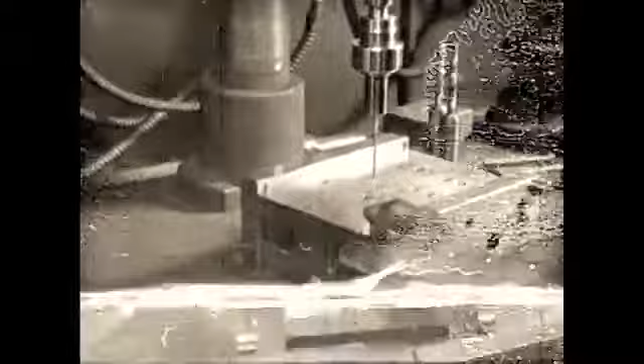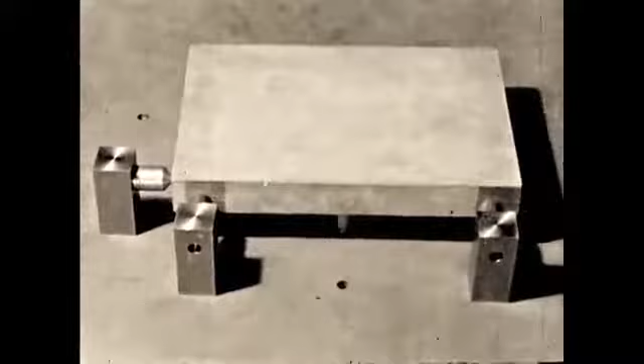Therefore, we see that it is necessary to have at least 6 locating points correctly arranged to definitely position a piece at a certain place. But sometimes a fewer number of stops can be employed successfully because some of these stops may combine several locating points in one member.

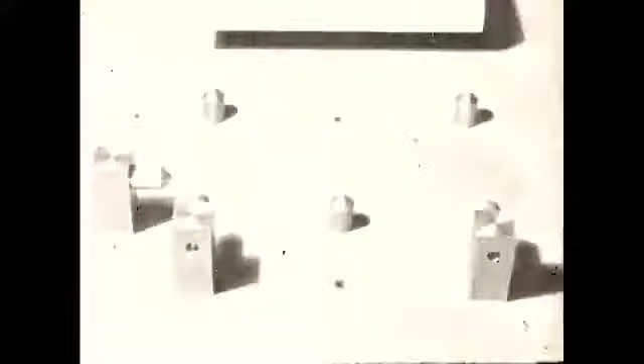For example, if we have a round hole in a piece of work, this can slide over a peg of the same diameter, which prevents the work from sliding to the left or right, or from front to back.

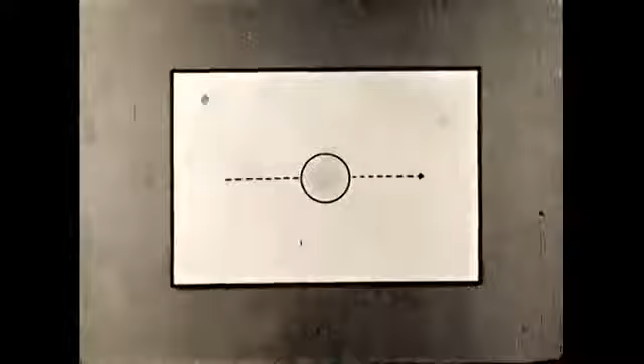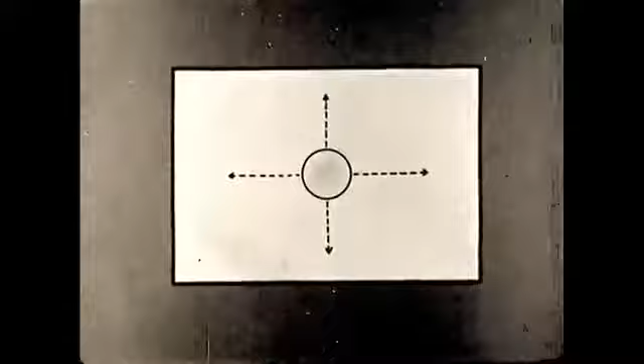If a shoulder is provided so the work can rest against it, it will prevent the work from rocking. Therefore, the only remaining movement that it can make is to rotate. If the work is held against a second stop, it is located definitely in a single position.

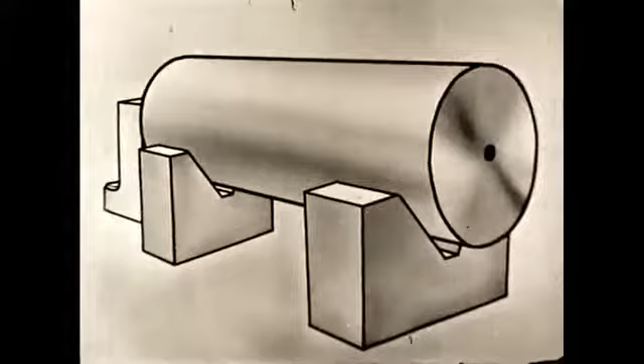Round work is frequently located by means of a V-block, which combines 2 locating points in a single member. These V-blocks and one end stop provide us with suitable locating means for a cylindrical piece, which need not be restricted against rotation. V-blocks are suitable for locating members having rounded portions, and they are also convenient for clamping means,

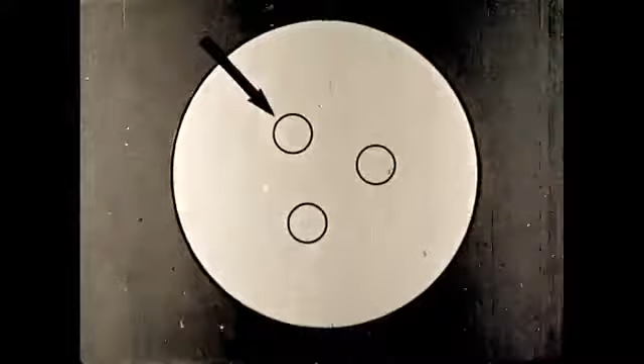As in this case. Whenever we support a flat surface, it is preferable to use only 3 fixed points, and these should be spaced as far apart as possible.

If we supply more supporting points than this, the additional points should be adjustable, and this is a good form of adjustable support. A spring in the base ensures contact between the plunger and the work, while the set screw clamps the plunger firmly in place.

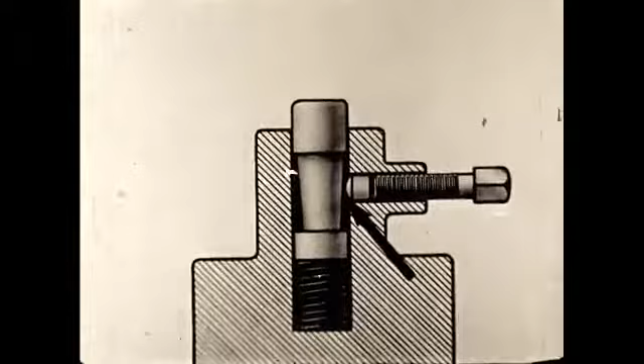And regardless of the amount of pressure applied to the screw, the work is not distorted. The taper slide acts to resist any pressure against the support.

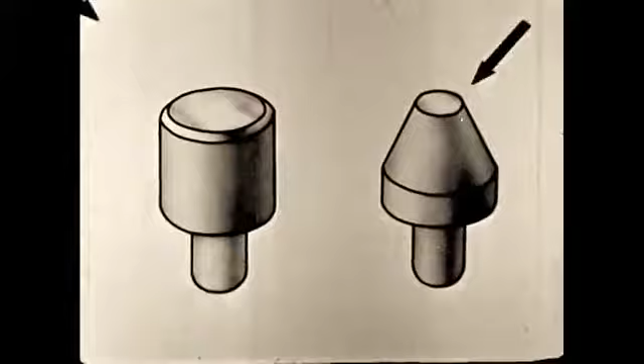The locating surfaces should be as small as possible, consistent with bearing area and wear, in order to make it easy to keep the fixture free of dirt and chips that would interfere with the proper seating of the part.

If a locating pin is to fit within a hole in the part, it should be tapered to permit the work to be placed over it easily, and should be hardened and ground to size. A burr clearance should be provided around the pin.

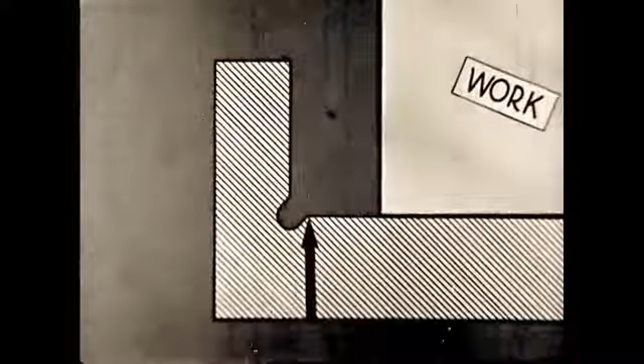If flat surfaces are used at right angles, a dirt groove should be incorporated. In general, buttons are better supports and locating means than flat surfaces, and a button is better if it is placed end-on instead of sideways to the work.

The work should be supported as nearly in line with the tool thrust as possible. In this case, the work is not adequately supported, and the thrust tends to bend the work. Another thing, the leverage of the extended work requires more clamping pressure to secure the piece.

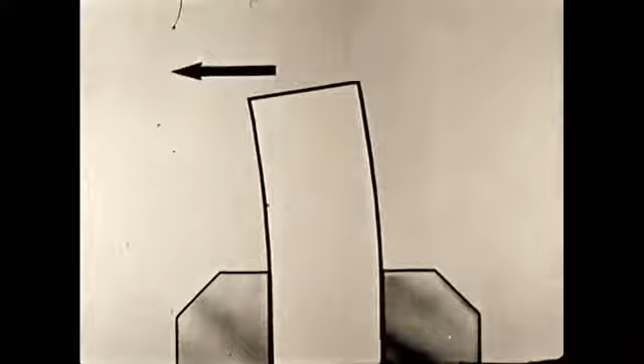When the clamping jaws are more nearly in line with the thrust, the work is much better supported against the pressure applied by the tool.

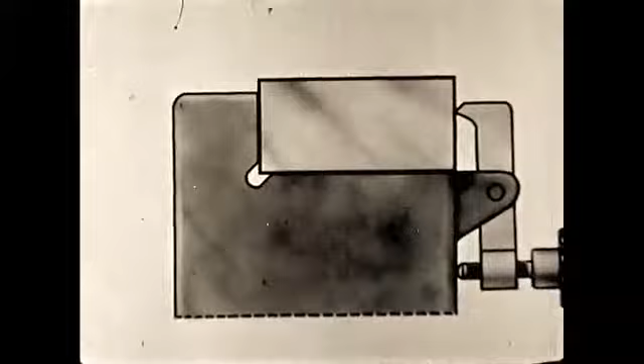A fixture should always be designed so that the tool pressure comes against the solid part of the fixture and not against the movable or clamping portion.

The part may be clamped in a variety of ways. Here is an example of a lever combined with a screw clamp. Sometimes a cam is used, and here is an interesting example.

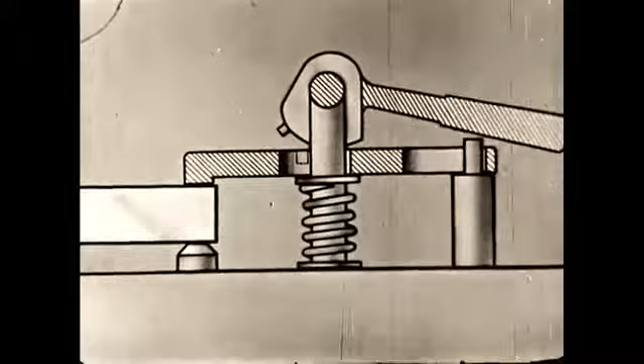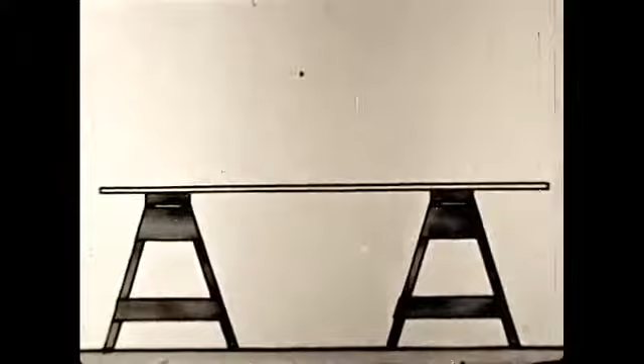A wedge is another method of clamping. Whatever kind of clamp is used, the work must be correctly supported. This can be readily understood if we consider a board on two sawhorses. If pressure is applied in the middle, the board will bend.

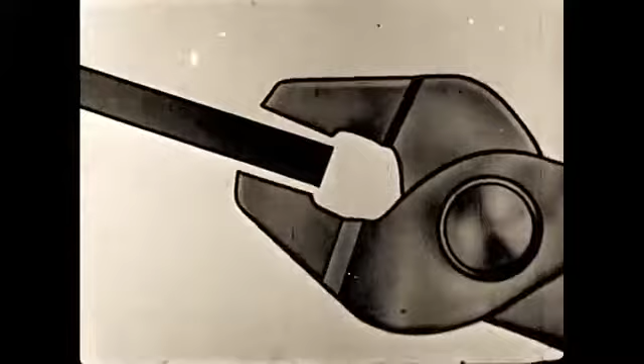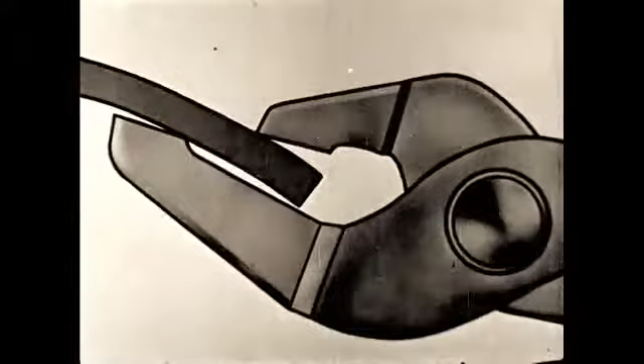A good example of the proper clamping principle is an ordinary pair of pliers, where the jaws being opposite to each other can get a good grip on the work. Whereas if the jaws were not opposite each other, they would fail to work properly and tend to bend the piece to which they were applied. With this principle in mind, we can see the need for adequate support directly under the clamping point.

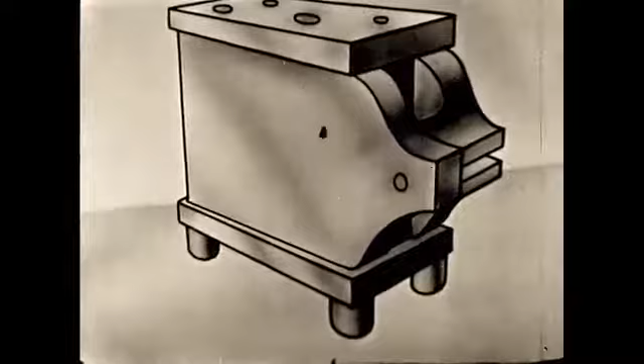Drill jigs should be supplied with legs. Otherwise, chips would be more likely to interfere with the jig setting squarely on the table. Many authorities prefer using four legs, so that if any dirt gets under one of them, it can be instantly detected because it permits the jig to rock.

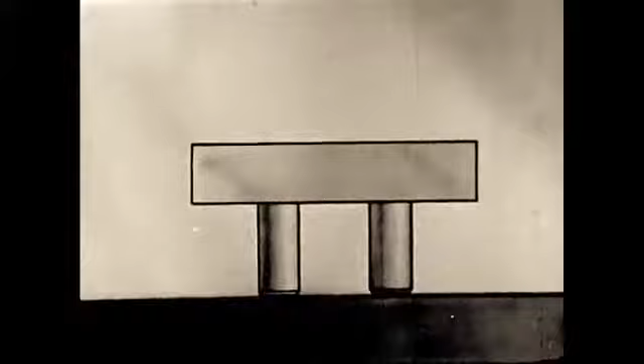It is important that these legs be made larger than the slots in the drill table, so there is no danger of them dropping. The feet on a jig should be as far apart as possible so that pressure will not tip it.

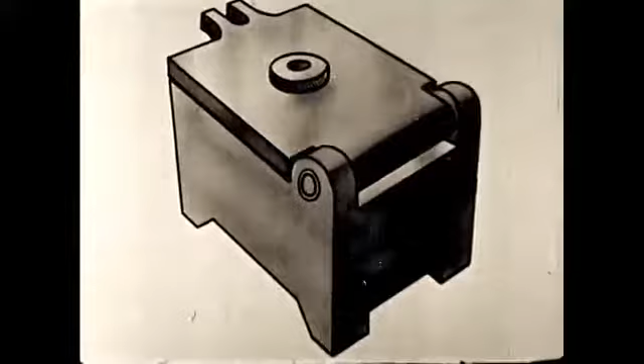One of the most important forms of jigs is the box jig, in which the top is hinged so it may be opened to insert work and closed for clamping. In this form, it must be kept in mind that the top must be accurately located if it contains any bushings, so these will always come in the same place when the jig is closed.

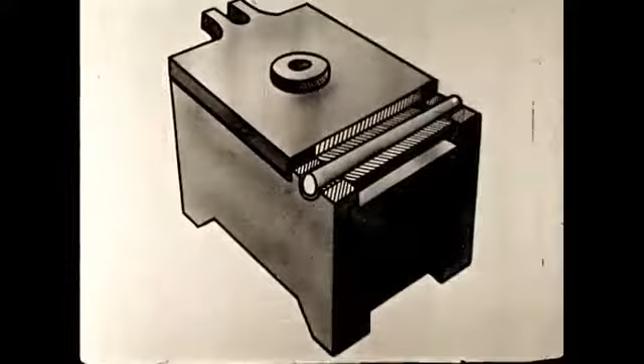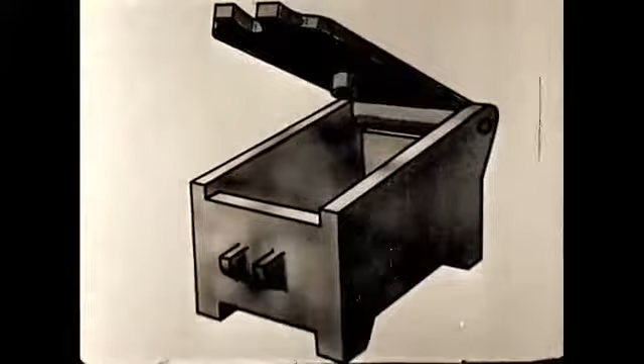For this reason, it is better to have the ears rotate on the hinge pin, which is a drive fit in the center portion, as this provides better support. A still better method is to have the top fit closely between the sides, which provides the maximum possible support.

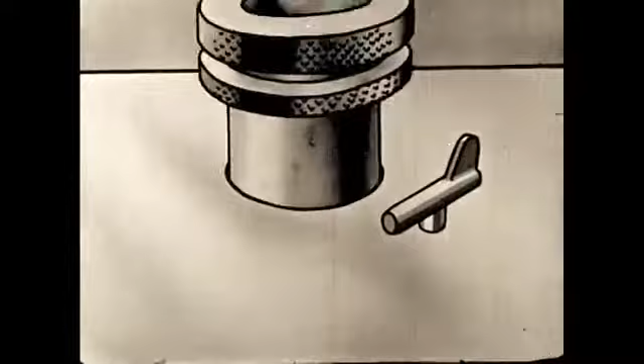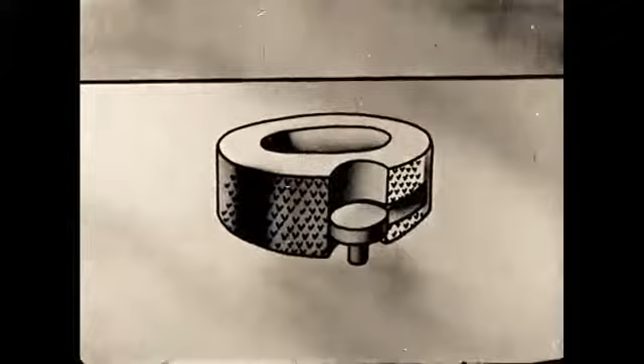In the case of drill jigs, bushings are used to guide the drill or other tool into the proper position. It may be pressed in permanently if only one size of drill is to be used. If several operations are to follow each other, such as a drill followed by a reamer, it is necessary to use slip bushings. These should be arranged so they can be quickly changed, yet firmly held so they do not work out during operation of the tool. Here are several holding means for using these slip bushings.

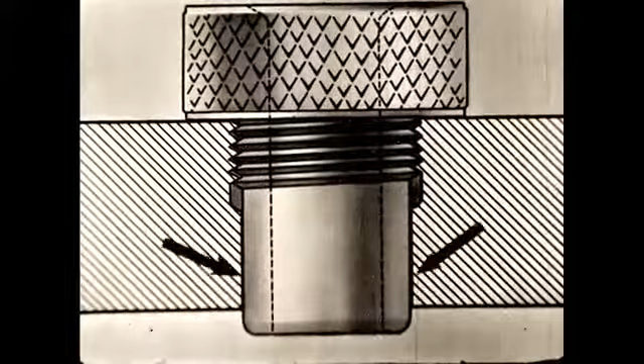If a threaded bushing is used, it is advisable to locate the bushing by a smooth cylindrical surface, using the threaded section only for the purpose of holding the bushing in place.

If the inner corner of the top of the drill bushing were left sharp, the drill would not enter easily. Therefore these edges should be either rounded to a radius or beveled off. This chamfering should be the same angle as the point of the drill.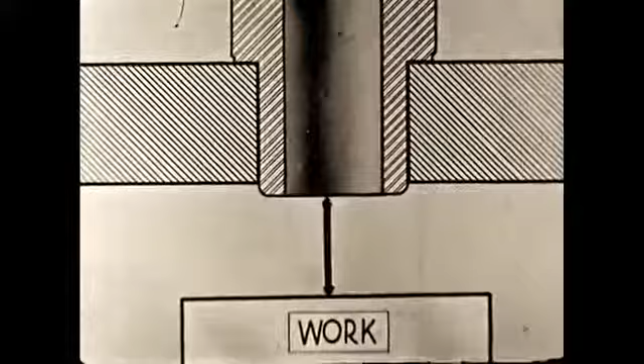There should be a space between the bottom of the drill bushing and the work to allow room for chip clearance. This space is usually approximately equal to the diameter of the hole being drilled. If the drill bushing is brought into contact with the work, the chips must pass out through the top of the bushing. This is occasionally permissible if the hole is a shallow one which must be very accurately located.

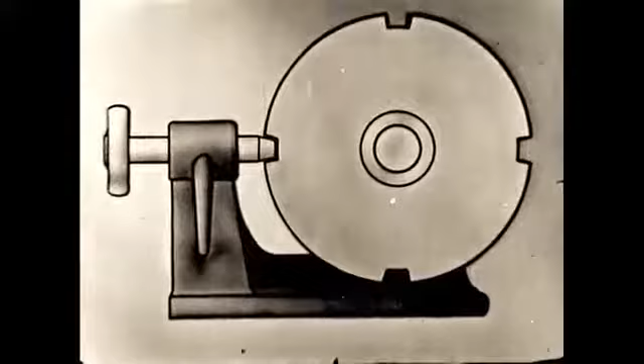Another function frequently incorporated in both jigs and fixtures is the indexing of parts to produce a series of accurately spaced holes, slots, and so forth. Such fixtures range from the simplest hand-operated indexing disc and pin like this, to automatic fixtures adapted to high-speed production of large quantities of parts.

The part is held in the collet, which is tightened by a spanner wrench. After each slot is cut, a plunger on the right-hand side of the fixture strikes a stop, thereby indexing the part for the next operation.

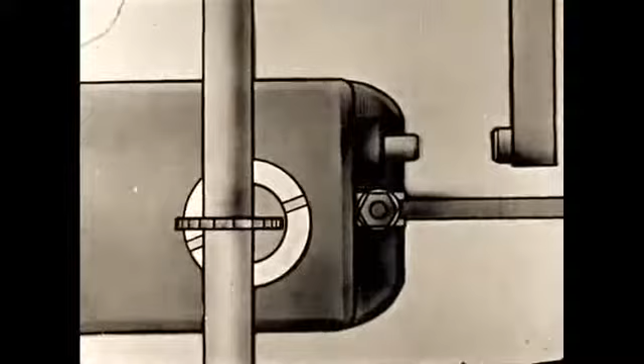Removing the protective casing, we can see how this operates. A ratchet turns the mechanism, while a pin locks the mechanism while the cut is being taken.